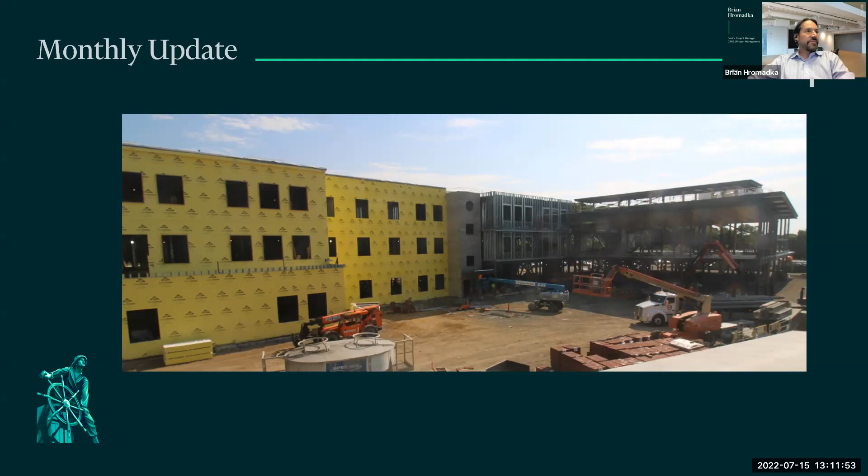Overall, the project continues to track to an on-time completion. We had a 13-day lag that showed up in the schedule last month, and that has been cut in half, leaving a 7-day lag in the current schedule update. You'll have that full schedule in the back of the monthly report.

We're projecting that 7-day lag will disappear in the next month or 2. The CM has been actively managing all the work on site to keep things on schedule. We did have some slippage with the Building B steel and glulam taking a little longer than anticipated, but we've had some expedited work with the interior rough-in that has helped to make up for that and keep the schedule where we need it.

The project also is tracking to the budget, so that's good. We continue to have some concerns about lead times, but so far we've been able to have the materials we need on site when we need them so the work can progress. Much of that is due to the CM being proactive with communicating with the subs and getting submittals sent in and approved earlier than normal.

We're also still seeing construction prices very high, but thankfully, since we have fixed price contracts now on this job, we're protected from any further escalation.

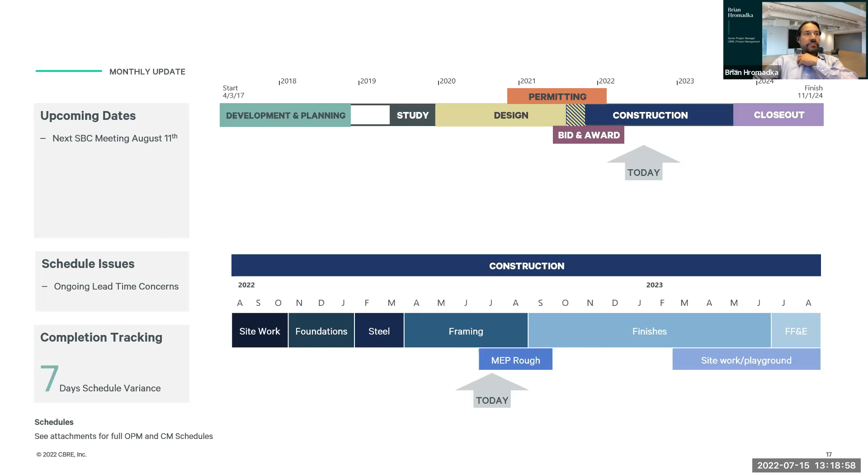So the OPM continues to do the same thing pretty much as last month, managing the overall project. We've been finalizing some decisions and contracts with the utility company and the health department, and also handling some final site items with the school district - trash cans, benches, EV chargers, and the like. We continue to file regular reports to the MSBA to update them on the project and to review all the potential change orders that have been coming up throughout the construction process.

Also, we are keeping the community up to date. Last month, we had a concrete pour in building B that went off without a hitch. Notifications were sent out via email and flyers to all the local residents. We have temporary construction lights that are on now at night on all the floors. These are providing light during the day when the workers are working, because now a lot of the building is enclosed, and then after work hours, it's for safety and security on the job site.

We have one more concrete pour, as I mentioned earlier, scheduled for the 21st. That's going to be a longer activity - that'll be the slab on grade for building B. So that work is expected to extend late into the evening with some work lights, but minimal noise. Once again, we'll be sending out notices to all the neighbors via email and flyers, and there's also information posted on the project website for that.

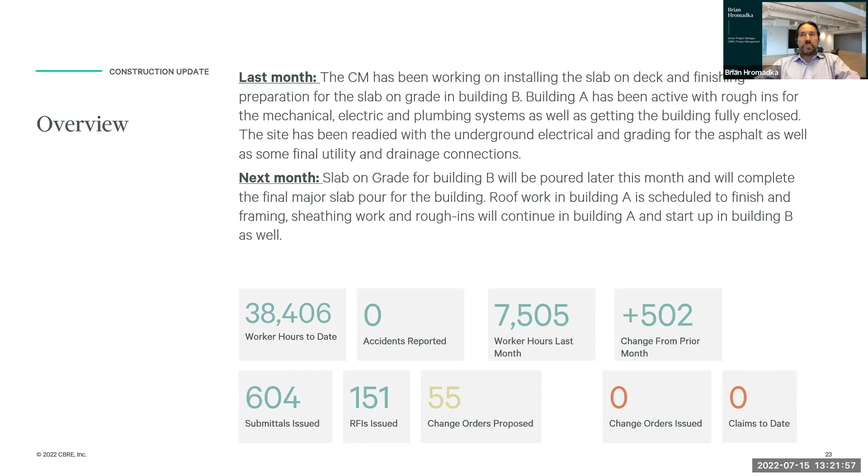Here you can see some of the milestones. We've been tracking that throughout the job. Some of these have been ahead of schedule, some behind schedule, but overall the job is tracking within the substantial completion date of June of next year. So I will let our CM, Alex, walk you through some of the details about what's been happening on the site.

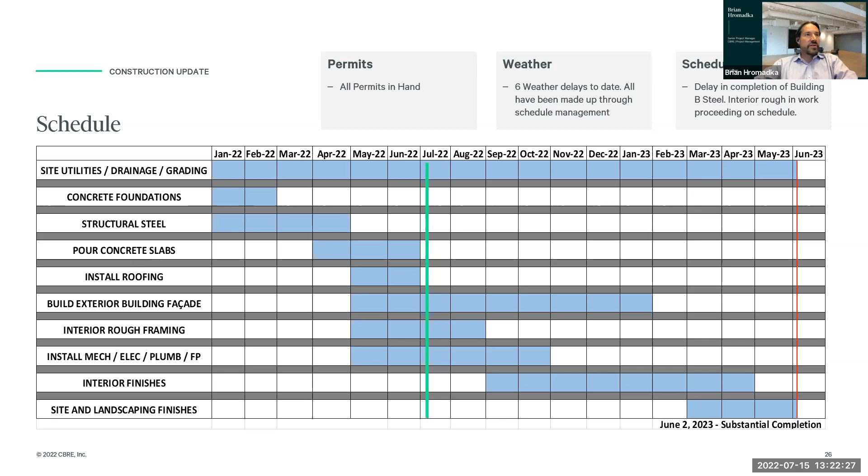This month, we're going to look more at the interior of the building using the OpenSpace program that provides a lot of insight into what's been happening on the job. So I'll stop sharing my screen here, and Alex, if you can pick up.

Yeah, it looks like my screen sharing capabilities are disabled at the moment. I don't know if someone can let me in. Okay, yeah, I think Maria can help us out with that. All set, thanks Maria.

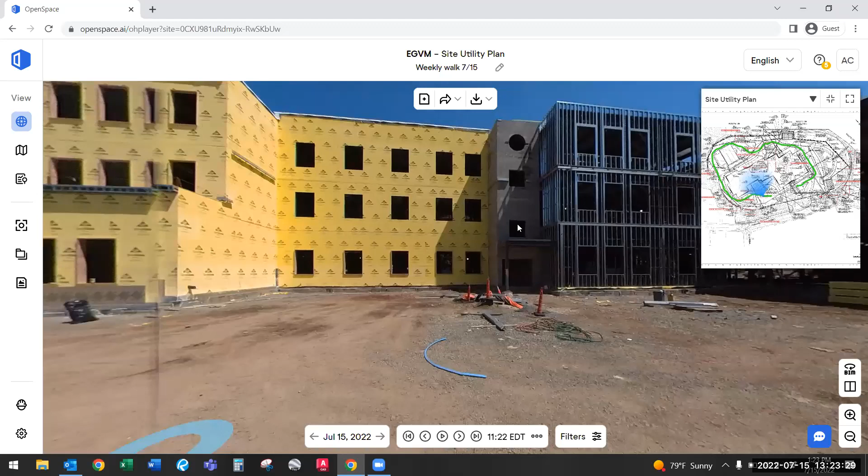Can you guys see my screen all right? Okay, I'm going to spend a moment talking exterior. I'm sure many of you have driven by the building and seen what's going on, but I'll give you a brief tour of the exterior and get more into the interior, as Brian mentioned, in a second. We're probably 75% complete with sheathing on what we're considering A building, which is the 3-story classroom wing. You can see the stairwells, both stair 1 to the left and stair 2, fully constructed. We actually have stairs in there as well, installed and poured with concrete, allowing us better access through the 3 stories of the A building.

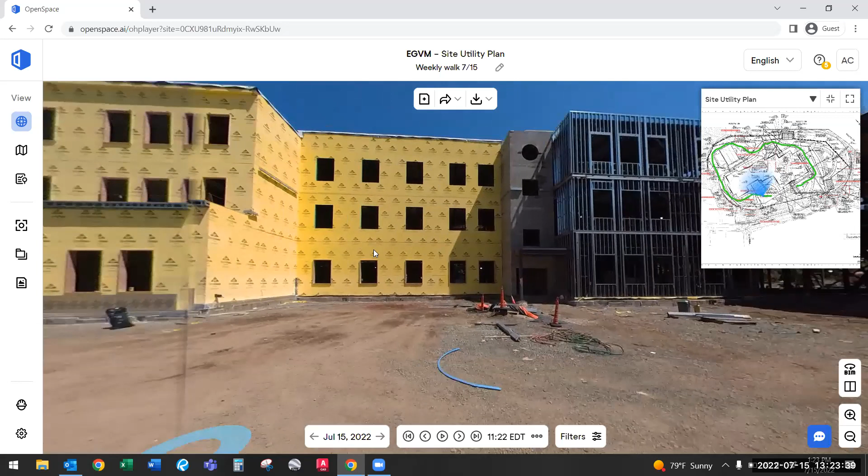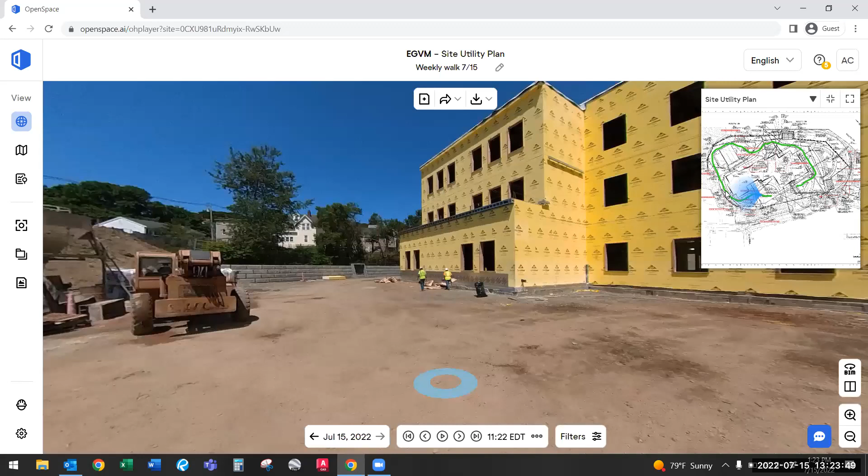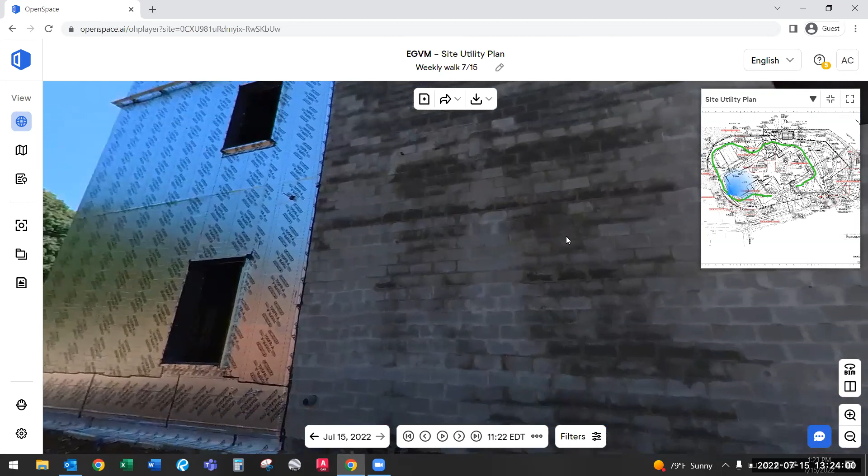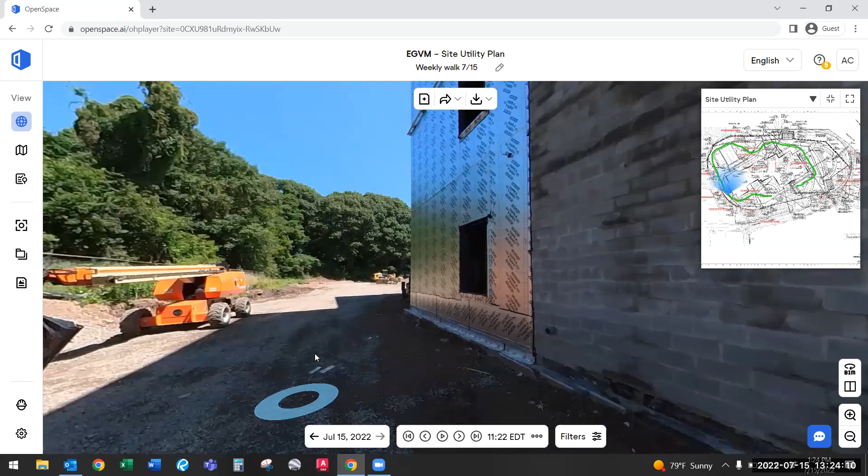So again, 75% complete with sheathing, which is what you see as the yellow material here. I'm going to work clockwise around the building. This is stair 1, CMU shaft wall that'll get enclosed with brick, or wrapped with brick. This metal foil material you see is the air vapor barrier, which goes on over the yellow sheathing. That provides a nice enclosure, not allowing air or vapor into the building.

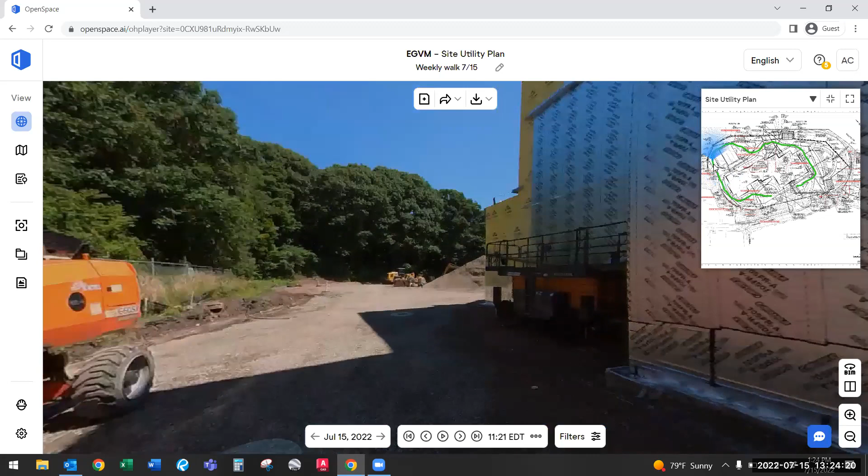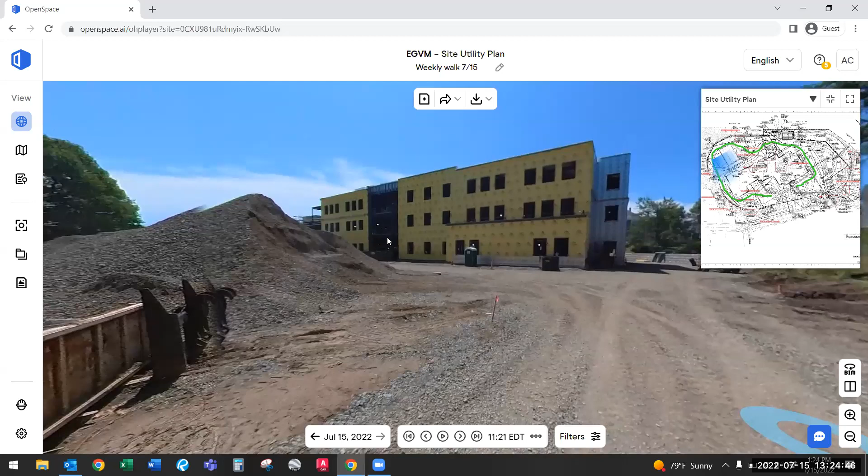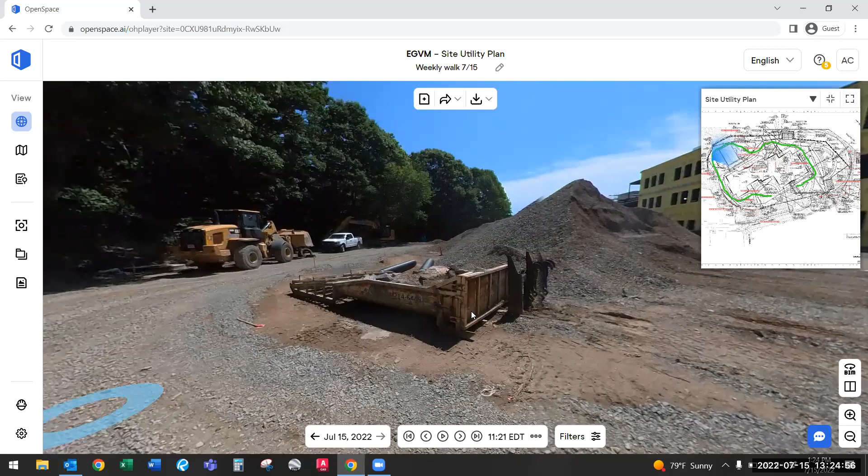Working our way northwest of the building now, you can see most of the yellow sheathing is up on the back side of A building. You can see the amount of fenestration on the north side as well, with all the window openings. This large area here is actually full 3-story curtain wall at the extended learning area, which will be a pretty dramatic space both outside and inside once we get the curtain wall installed later this fall. Where we're standing now is the play area - there's a turf field back here, a basketball court, and a lot of line striping for children's activities, as well as the playground areas with swing sets and multiple play equipment structures.

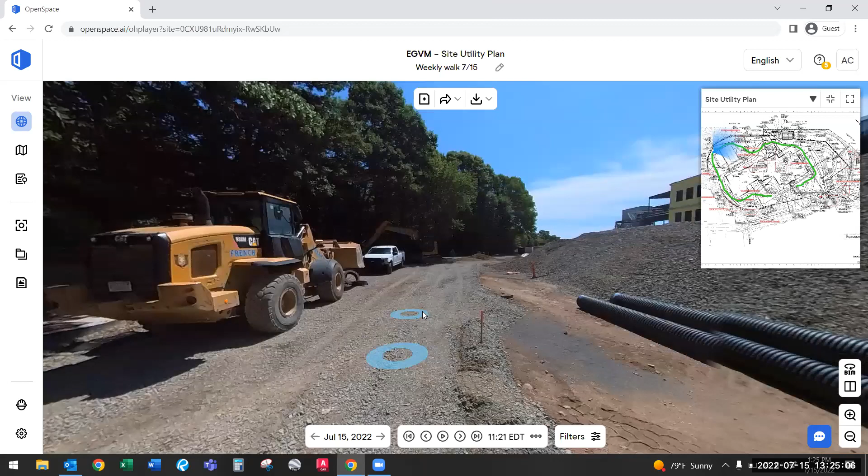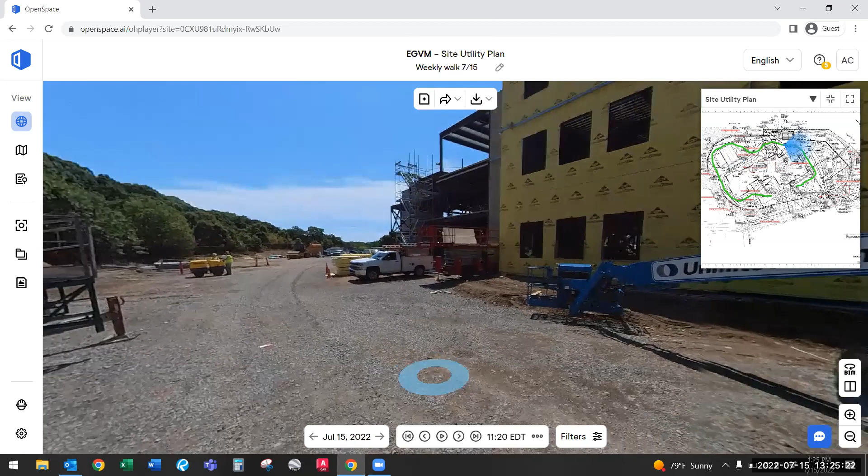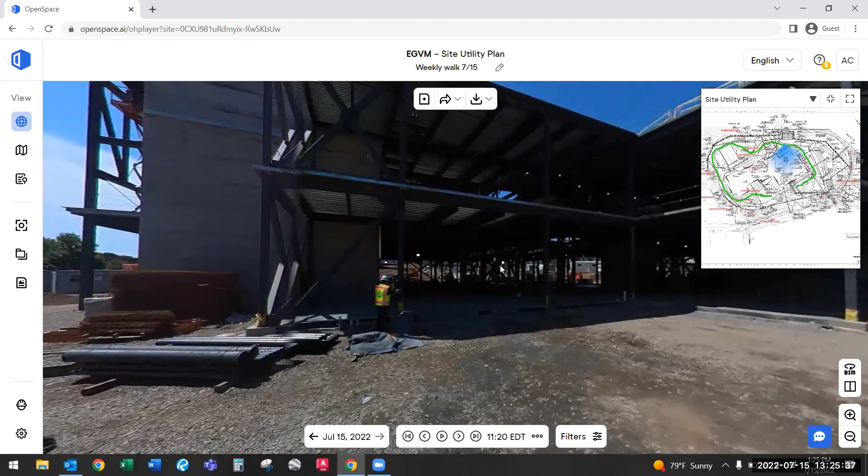I'm just going to bring you around here, looking back at A building. Again, this giant curtain wall area is a nice feature to the school. We're working our way to B building now, which, as Brian mentioned, is following right behind A building. That's an intentional measure - as we enclose A building, we focus on B building to follow after. You can see the backside - this is the custodial area and maintenance area as well.

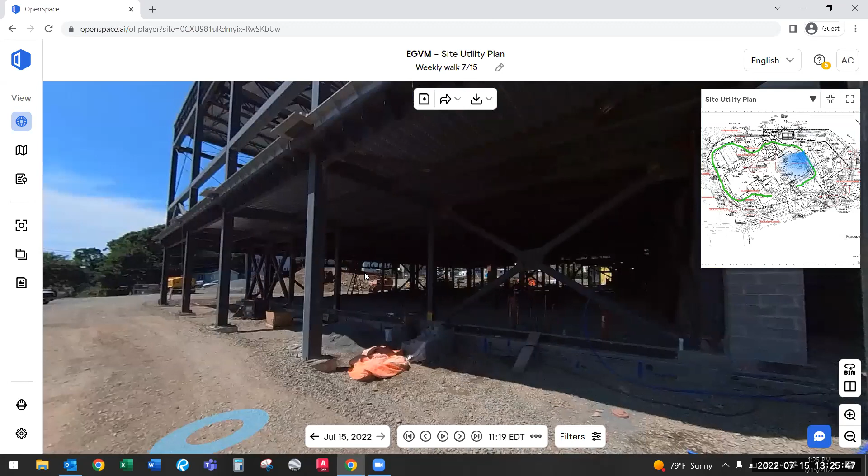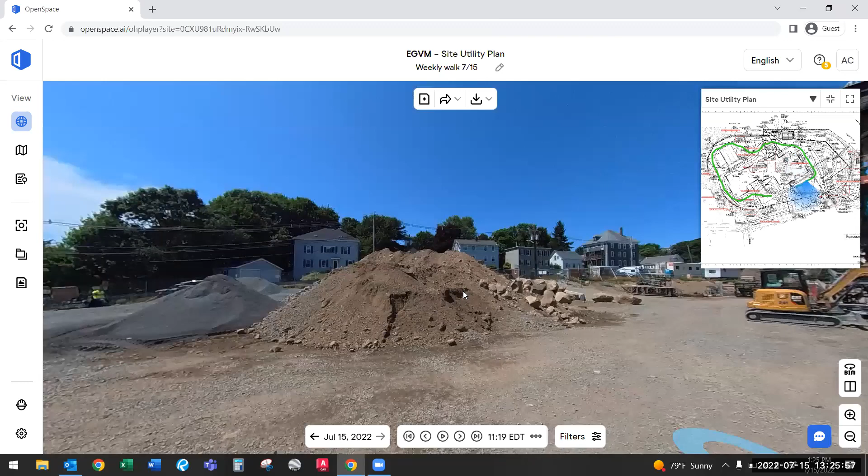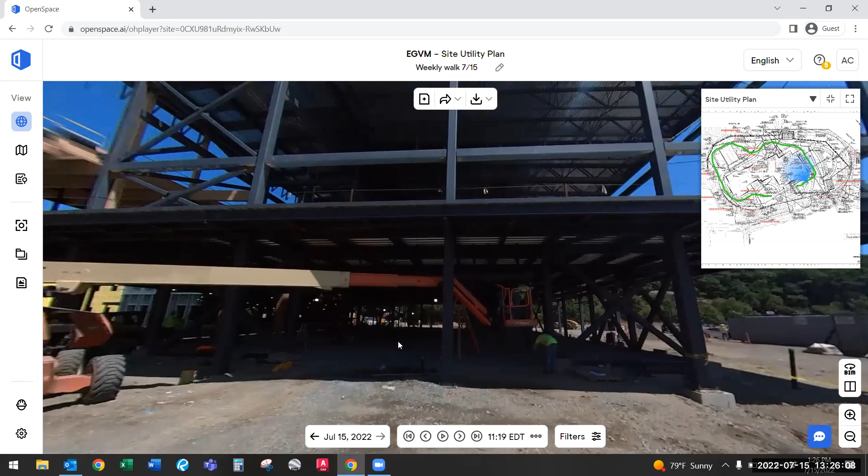On the eastern portion of the building now, looking into the cafeteria. Below, we've got an overhang here with some wood-wrapped columns, and right above it's the gymnasium. So again, quick little exterior tour showing where we're at. As Brian mentioned, all the steel is complete at this time. Concrete's poured on the 2nd floor, and we're working to get the slab on grade in B building poured later next week.

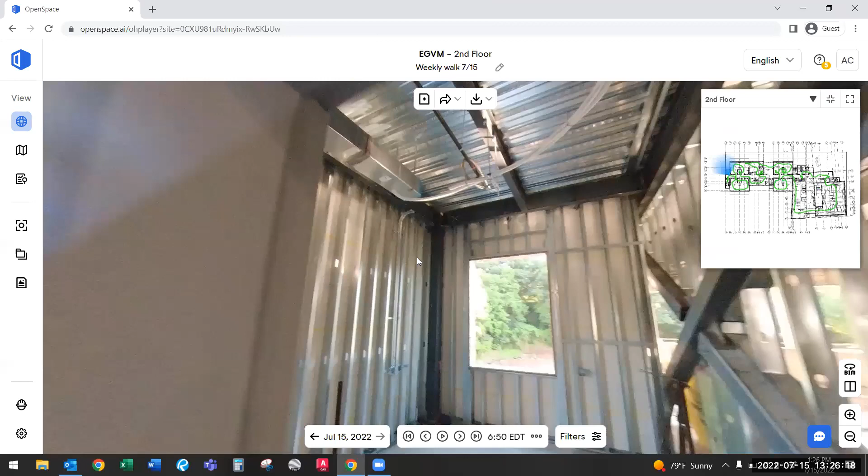I'll move to the 2nd floor interior because that's probably the most progressed so far in A building. So as you can see... oh, go ahead.

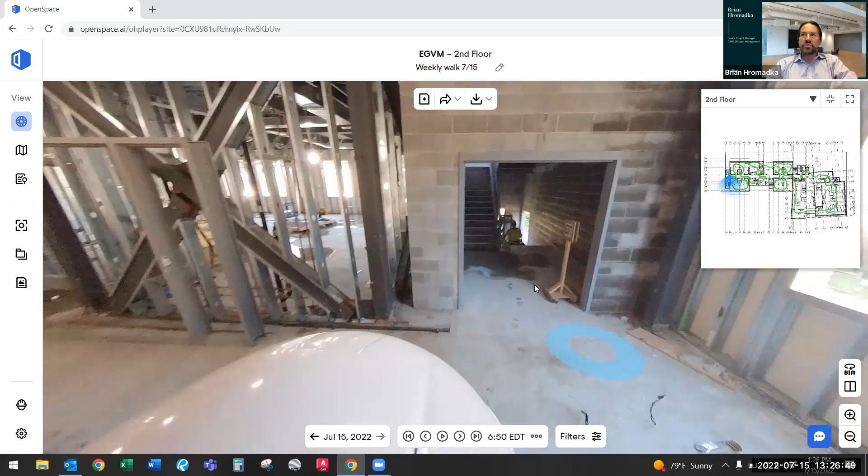Can I just throw in a comment, Alex? Just wanted to point out, as we're looking at all these images, one of the nice things is that these images will be available for the maintenance department, and once the job is complete, for them to go back and see what was constructed at different times, and what's behind all those walls. So it's something to keep in mind, it's not just what we see right now, but the record of this will continue throughout the life of the school building. Yeah Brian, that's a good point.

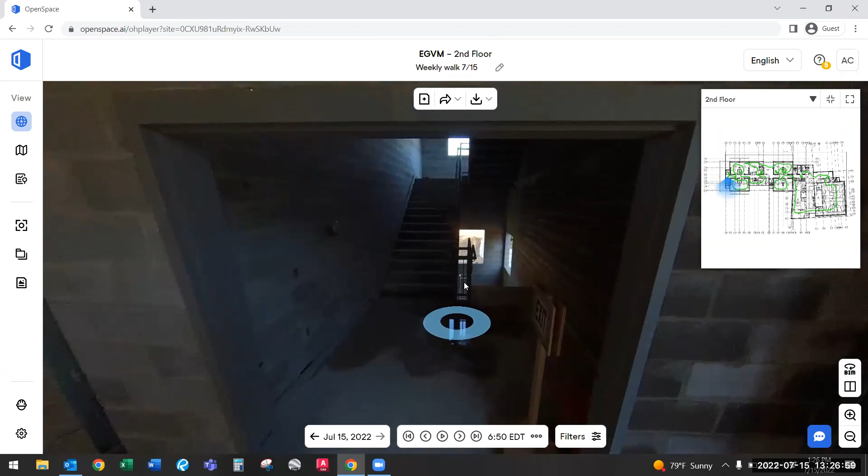The purpose of OpenSpace is really a documentation tool, so you can see the progress, identify any things that may be in the wall that are obviously hidden once drywall and paint goes on. We're just hoping it's a nice tool for the end user to have for documentation purposes.

So this is stair 1, fully constructed, concrete in the stair pans, which allows our workers to get up to the 3rd floor without much difficulty.

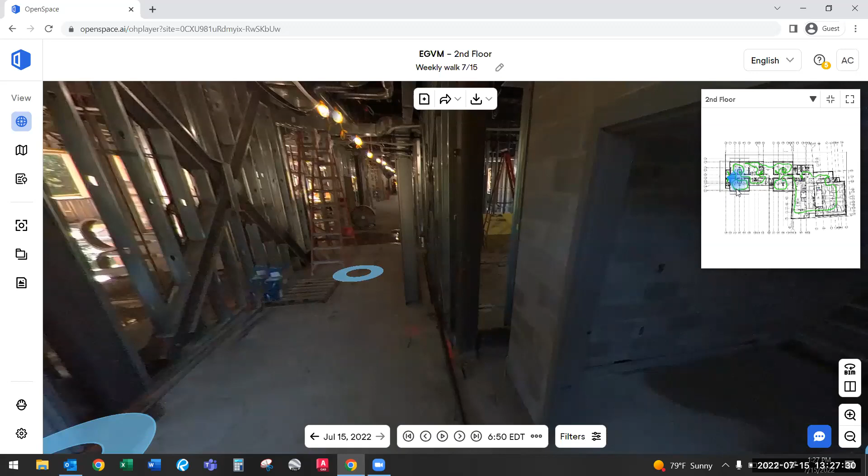This tour kind of zigzags in and out of classrooms, so I'll be brief. This is one of the larger classrooms on the second floor. You can see the small group room, and then you've got side-by-side classrooms with entry from the hallway here. You can see the supplemental steel we've installed.

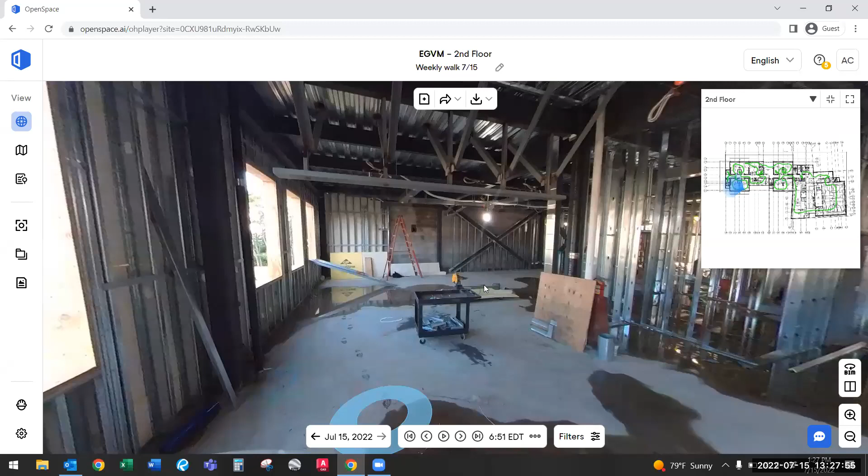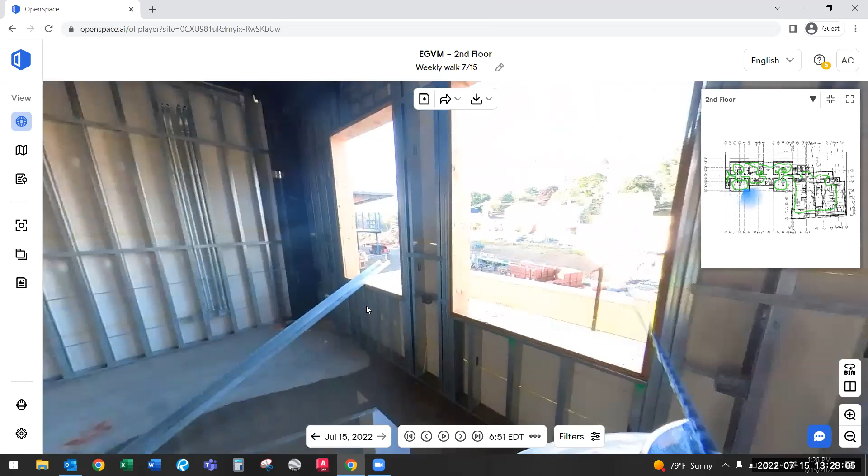That's going to be where the folding panel partition is, which will operate, open and close, to allow some flexibility when you want larger group sessions between classes. Again, a ton of natural light with these window openings. We're expecting windows to be installed sometime in October.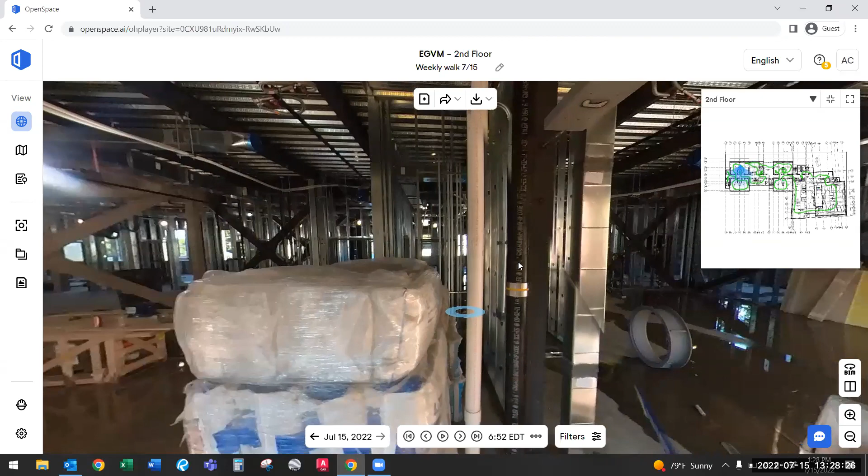But yeah, that's a typical classroom you'll see on the second floor, same on the other side of the corridor. You can see a lot of the guts for the buildings, a lot of the MEP stuff being installed, ductwork, riser piping, as well as electrical being started.

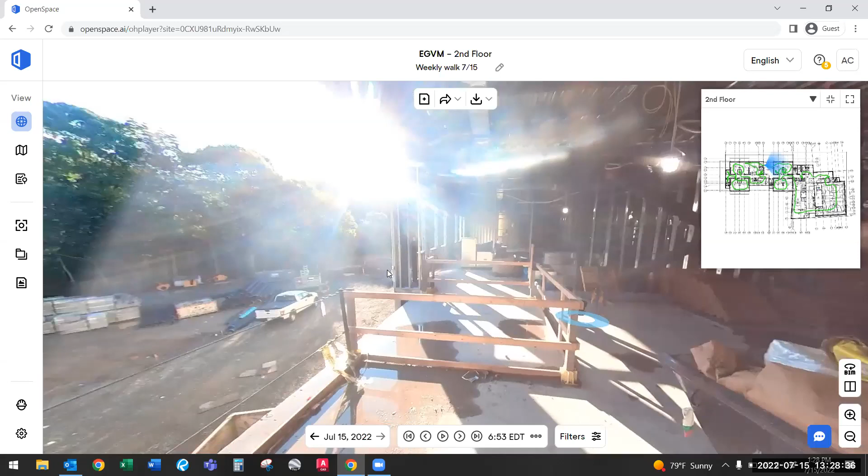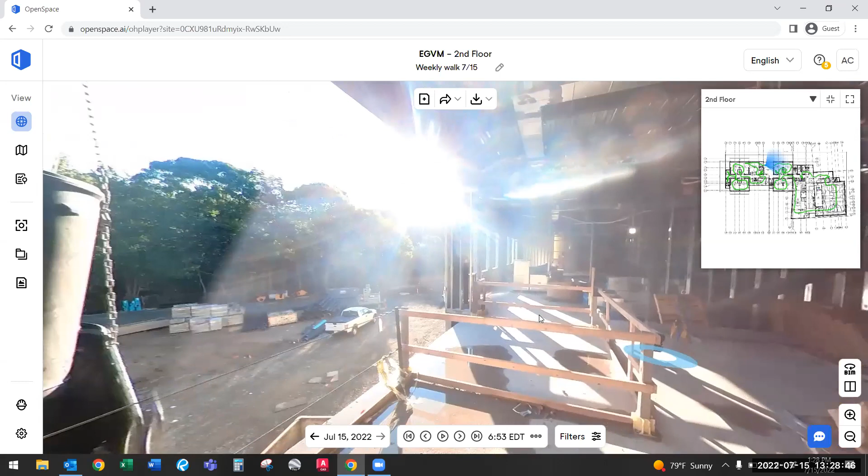I'll move down the corridor a little bit here. I mentioned the extended learning room with that large curtain wall space. We're using this as a trash disposal area to get material in and out of the building relatively easily. We'll keep that open purposely until we get the curtain wall, then close it in with the rest of the building.

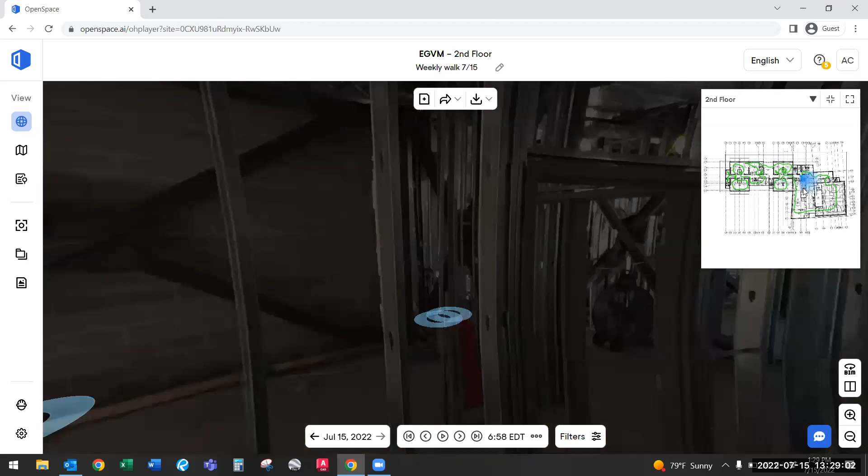I'll skip these classrooms because they're similar to what we looked at before. Now we're getting into B building. This is actually the elevator shaft that we've constructed as well.

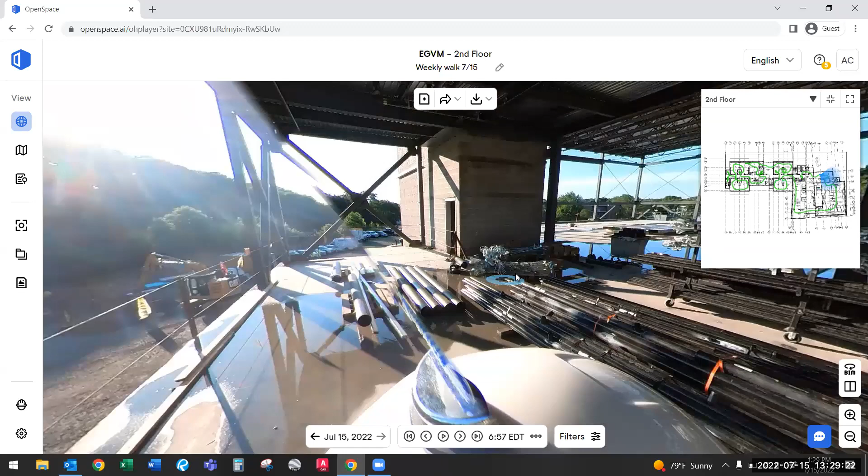We've got stairwell 3 right here, fully constructed, and stair 4, which gets you to the back of house area and the gymnasium as well. So I'll work through what's now, or will be, the music room right here.

We've got second floor fire protection lines, a recent delivery on Wednesday, so that'll start going up in B building as well. We'll work our way into the gymnasium space.

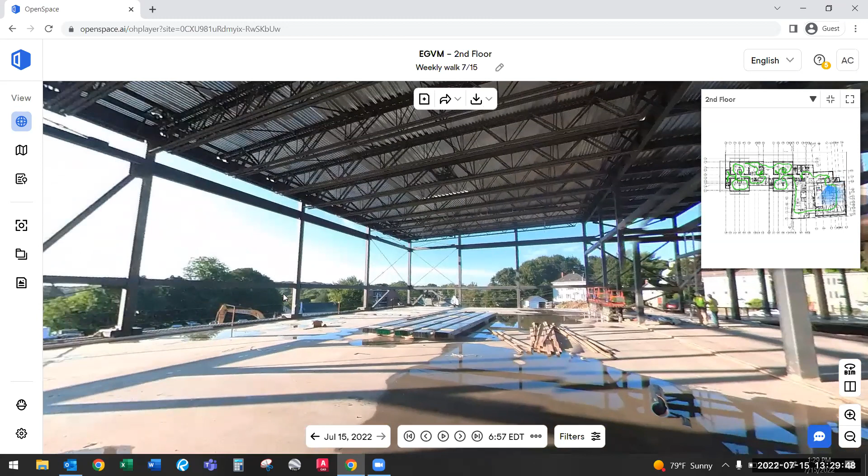Again, fully poured concrete slab. We've got stair 4 here, and then this picture probably doesn't do it justice, but this space is just enormous. It's going to be a really nice gym space for you guys.

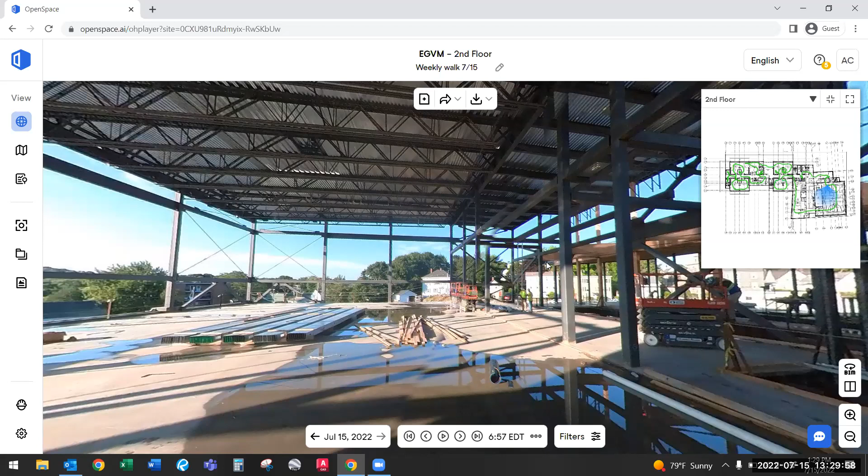There's also a platform here with a ramp that'll get you up to a platform. That'll start to come together, you'll see that better once we get some framing up. But platform and gymnasium here with the wood floor.

Just to give you a kind of 360 through the gym, looking straight at the platform. We'll work our way into the sort of hub area, if you want to call it.

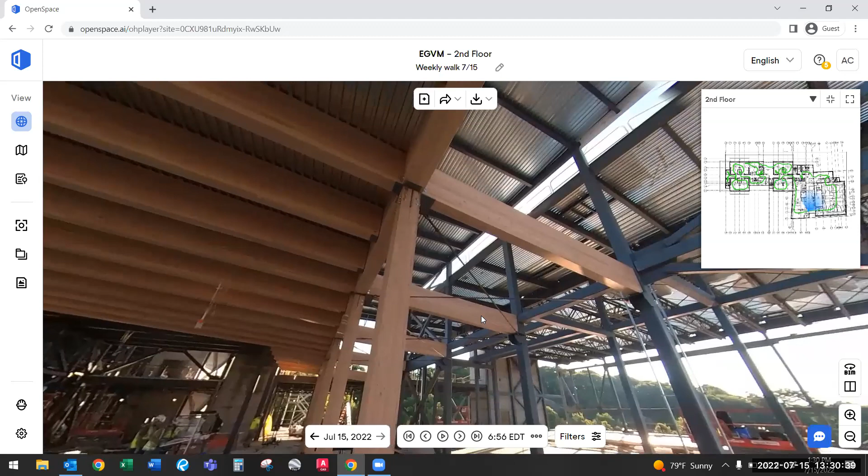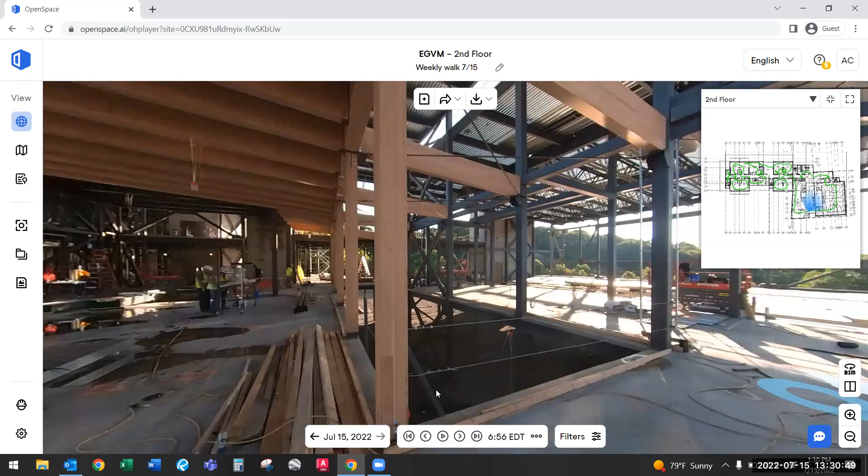Nice 3-story space, you can really see the glulams. I'm sure for those who've driven by, you've seen these wood beams and columns installed, but really up close it's pretty dramatic. This is going to be a 2.5, 3, 3.5-story kind of entry space into the building. This is the second floor looking up and down, obviously down into the first floor, so it's a pretty dramatic space with all this stuff installed currently.

Now we're getting into the art room, which is going to be on the left side here. This is actually supplemental steel for the garage door feature that will open and close between the art room and the media center.

And then I'll get a nice shot of the corner of the media center art room, where you can see just how cool these glulam beams are, all exposed. So really, really a cool space from Dore & Whittier.

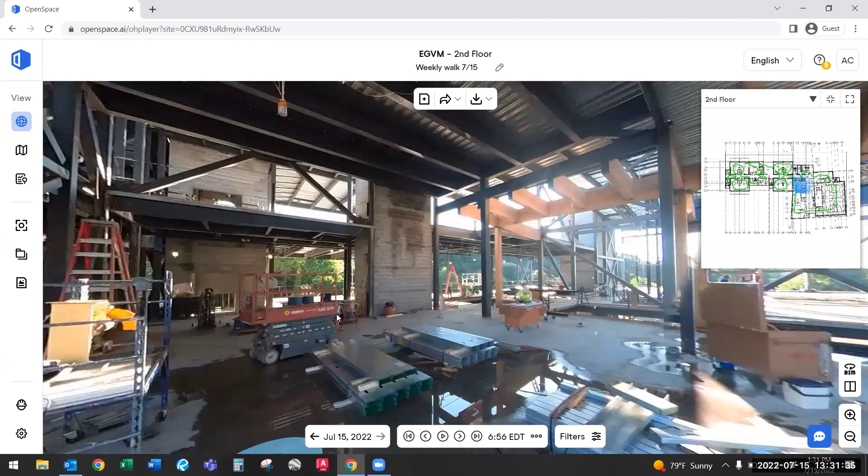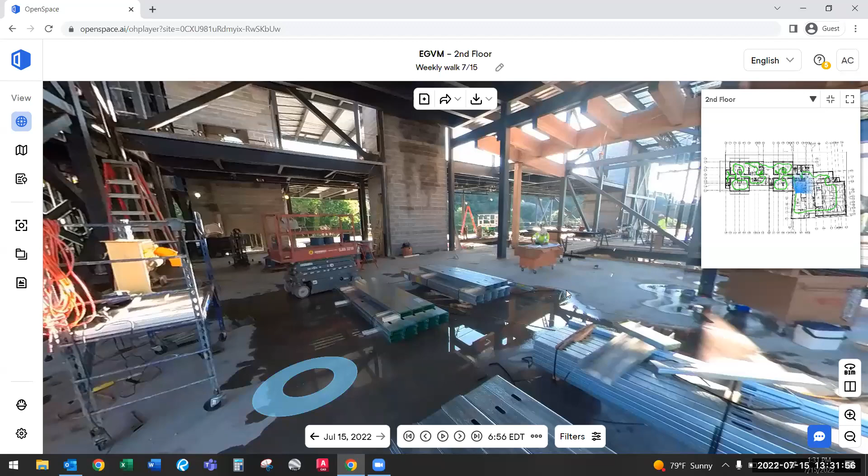So again, another pretty large media center space with a bunch of different isolated areas for different working groups to work in once the space is operational and usable. So that's it for the second floor. Just wanted to give you a sense of where we're at with progress between A building and B building being constructed, with rough MEPs and framing starting in this area. If anyone has any questions, I'd be happy to answer them.

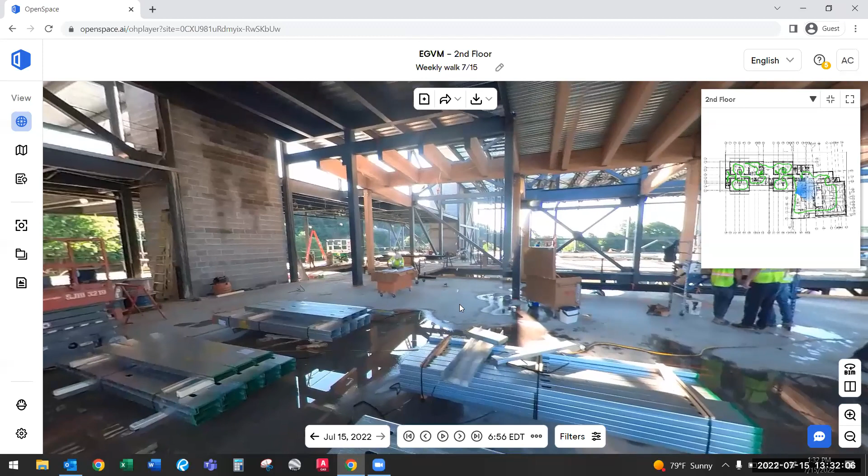It was very nice, Alex. Thank you, Alex. Any questions? Anybody?

Windows are coming in the fall, and it will be closed in for winter. The brick's going to start Monday, Matt. We've got a little mock-up — I meant to bring a picture to show you guys. I don't think you can see it from the building, but we did a stand-up mock-up to give everyone a sense of what it's going to look like and work out some construction details. We'll try to get you a couple pictures to show what that brick's going to look like. Layout for the bricks starts Monday, and then the masons will go pretty fast — you'll be surprised how fast they go putting brick up. It's going to dramatically change what this building looks like in the next few weeks to a month, if I had to guess.